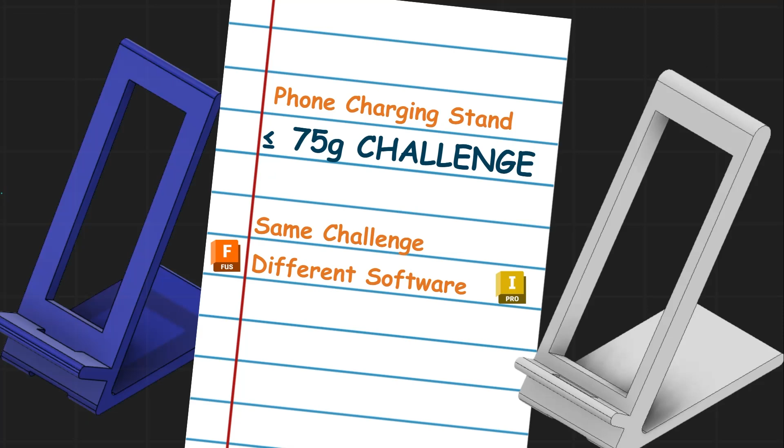Today's challenge, phone charging stand, 75 gram limit. So this is the same challenge with same constraints, different software as episode number 1. Last time we were in Inventor, today we are in Fusion.

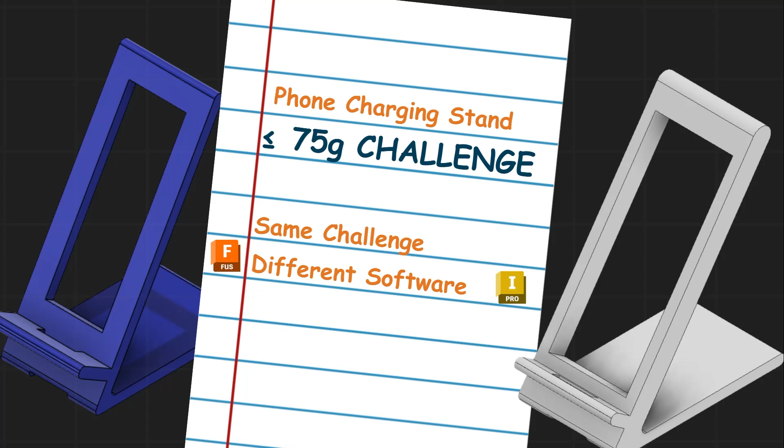So again, just a reminder, these are our design criteria. So it must be 3D printed, must use 75 grams of filament or less. This time we're using Fusion for our CAD, still using Bambu Studio for our slicer. Let's get to cooking.

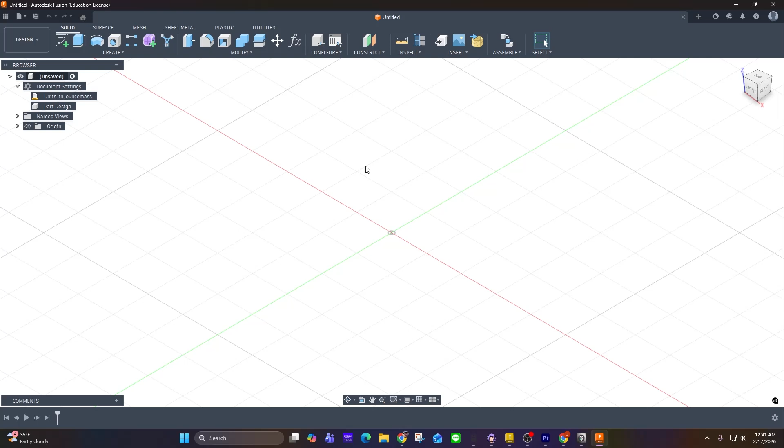All right, so here we go in Fusion. I'm going to follow the same workflow as last time. Probably throw in a couple of steps just to show some of the differences that I'm aware of between Fusion and Inventor. I am a native Fusion user. That's what I teach in my classes, so I'm pretty familiar with that.

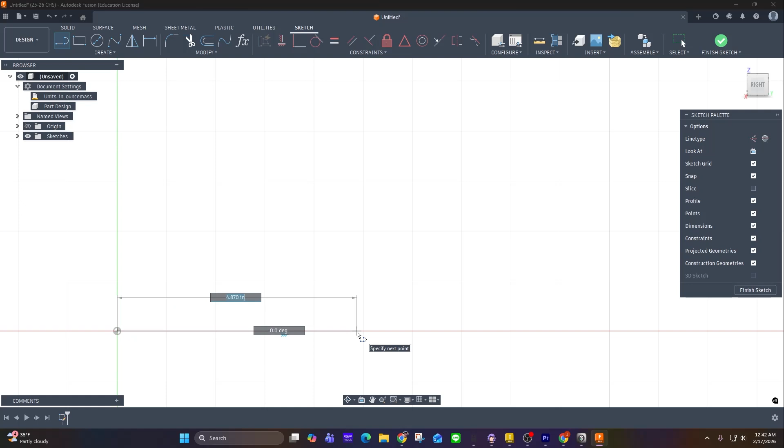So we're going to start the same way by doing a sketch on the right plane of the overall shape. I always recommend starting in the origin. I'm going to do a 4-inch long line. Then I'm going to left click and hold to make that arc. One of the things I like about Fusion is it's got the line/arc tool.

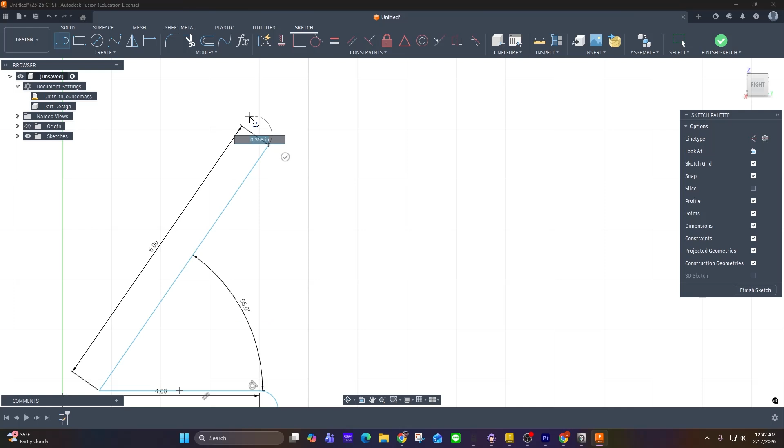If you just click, it does a line. If you click and hold, it'll allow you to do an arc. So no need to constantly be going back and forth. There we go. Now we've got the overall side shape.

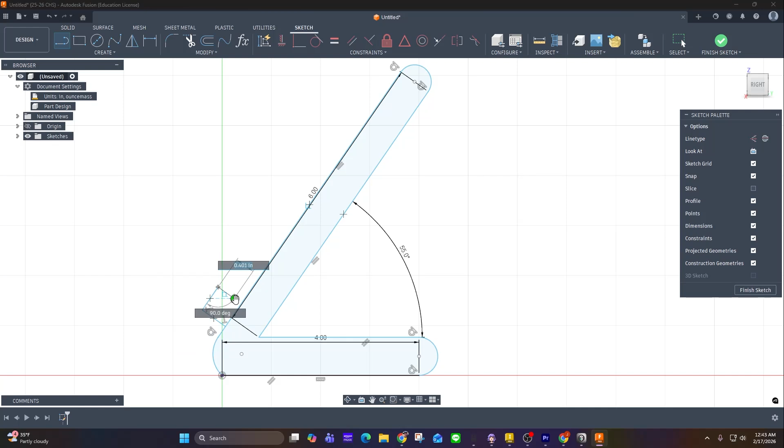I'm going to go ahead and create my rectangle lip out the front. Trim that little bit right there in the middle. There we go. Now we've got our overall size and shape, or I should say just shape.

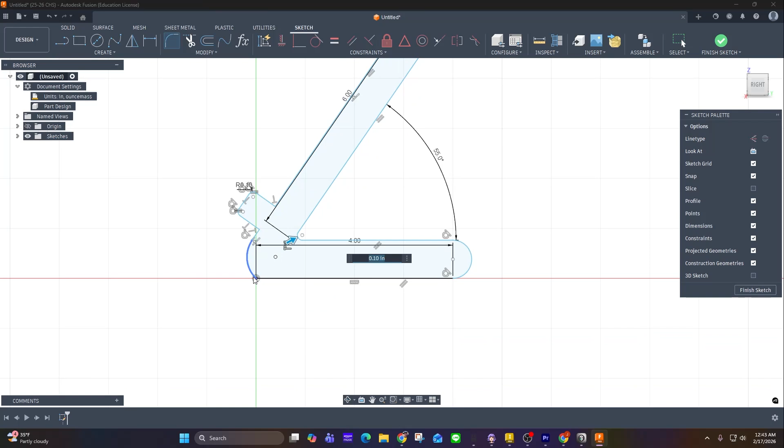I'm going to go ahead and fillet the corners here, make this a little bit rounder. Do the same on the inside here. Make that a little bit more of a nice round corner. All right, I think I've got everything kind of constrained the way I want.

That last tangent on this front corner made this very small, so we're going to make that a little bit bigger again. 0.5. Oh, that really didn't go where I wanted it to. Undo it a couple times, from here to here to give it that depth. We want that to be a 0.5. There we go.

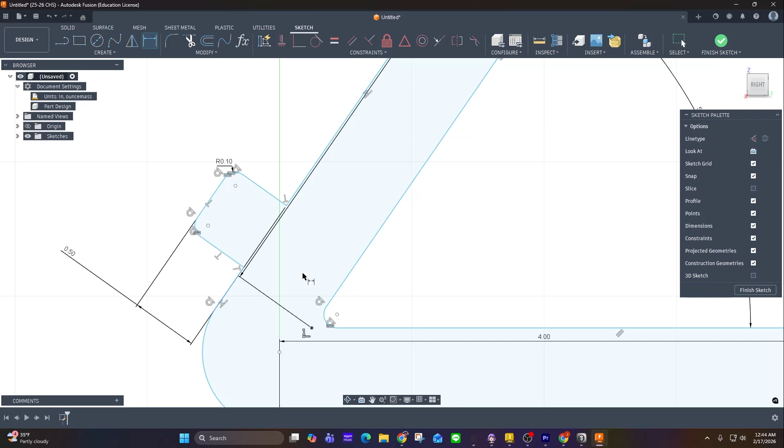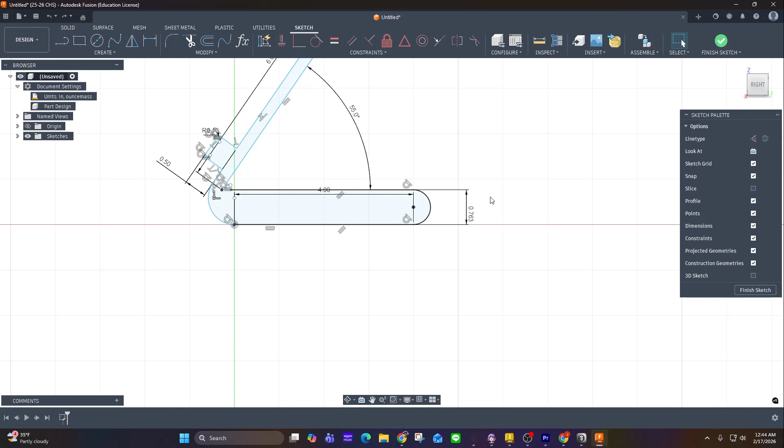All right, now let's make these a little bit thinner here and here. 0.25, check. We'll make this a little thinner as well. 0.25, check, check. You know what? Last time we ended up significantly under 75 grams on the filament. So we're actually just going to roll with this dimension. We're going to see what happens.

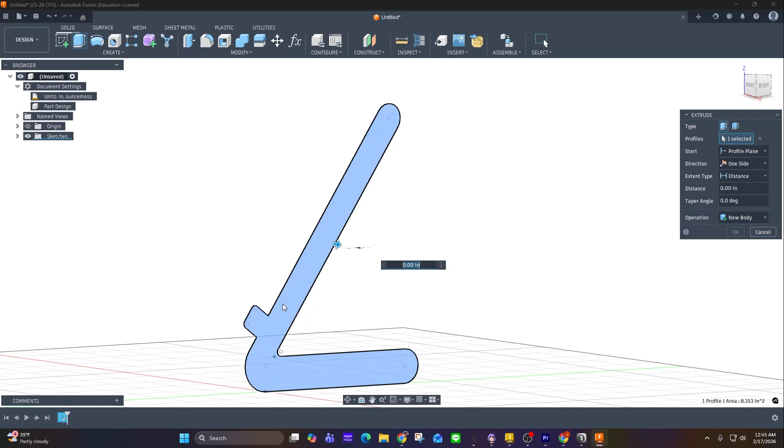So I like this overall shape. We're going to hit finish sketch. Looks very similar to what we did in Inventor. So again, next thing we're going to do is hit extrude. Our profile is already selected. We're going to do 4 inches, just like, oh, we did 2 inches last time, did we not? 2. There we go. Same similar shape.

One of the things I'm going to do real quick that I did not do in Inventor is change the material on this, and I'm going to change this to plastic. And then it's going to let me do a property check at the end to show how much as a solid object, because we're in solids, Fusion would assume this is. Just kind of doing that for smiles and giggles.

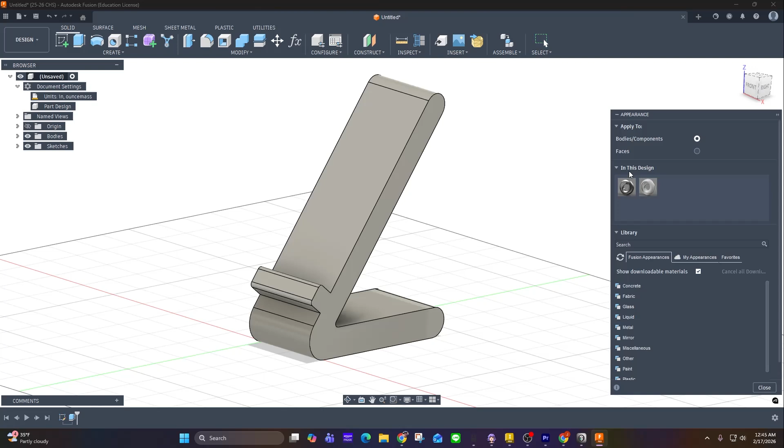And I'm also going to change the color on this just to make it a little bit more exciting than white. So I've clicked A for appearance, going over here to blue, clicking done. There we go. We could have done that in Inventor. I just did not.

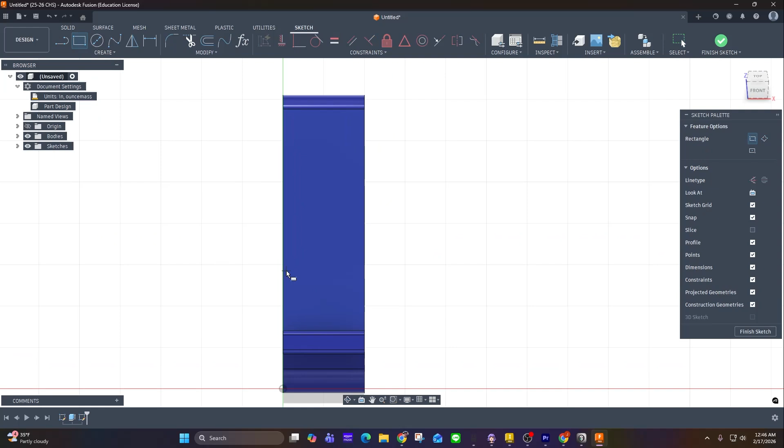So now we've got our overall shape. Now we want to create that square cut in the front. Similar workflow again, so rectangle right here on the front face. Use the dimension tools to lock in where we have it.

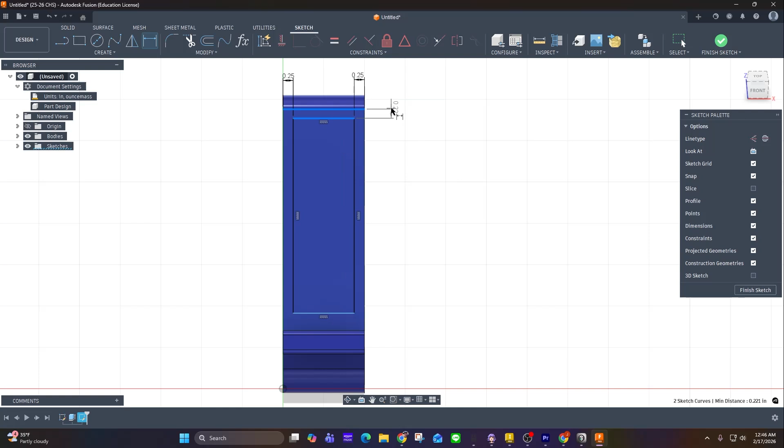So from here to here, 0.25. From here to here, 0.25. From here to this beginning of the curved line, last time we went 0.5. And then from here to here, we did this as a 0.25. Give it kind of a three-sided picture frame with a little bit thicker on the top.

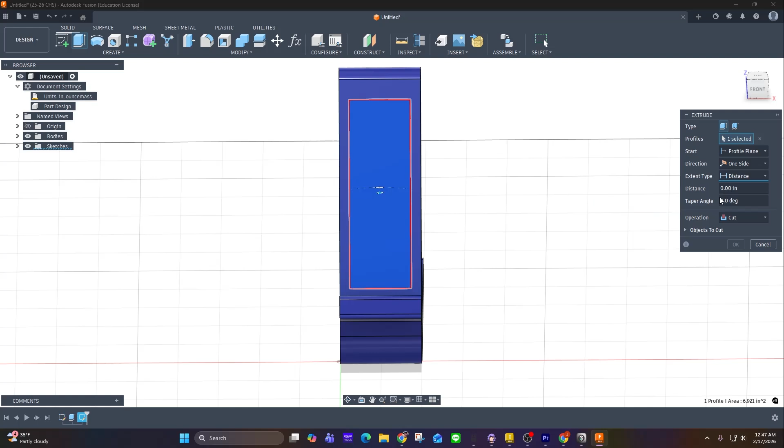So good with that. Finish sketch, do an extrude cut. So similar to Inventor, we have an operation here, and we change this over to cut. This one, the extent type instead of distance is to object. So again, same flow as Inventor, just some of the buttons and things are in different places or different clicks. So there we go. We've got our hole that's only through the top. There we go.

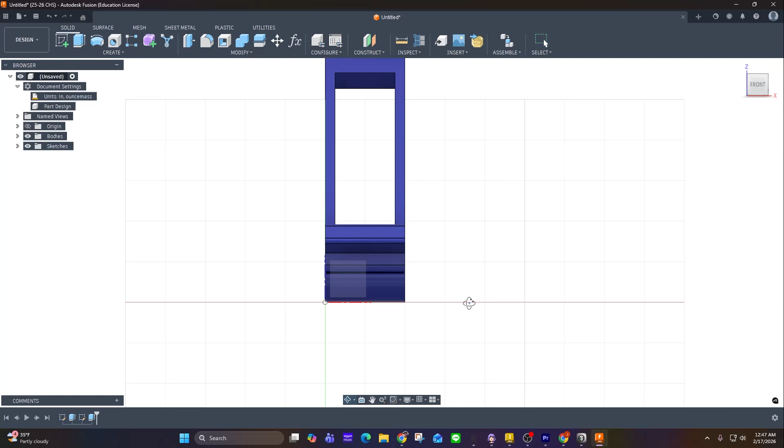Now we're going to do that bottom hole just like last time. So sketch. This time we're going to do an extra step here. Instead of carving in the middle of the object like we did last time and having to do a symmetrical cut, I'm going to create an offset plane. That's this button right here under construct. These are helpful for things like this.

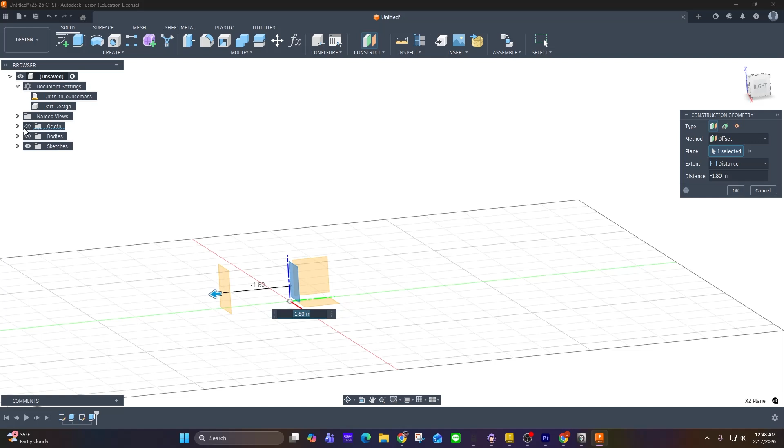I'm going to hide also the body here for a second. So this eyeball here in the browser can let me remove something for a few seconds to make my life a little easier. So this offset plane, I took this front face right here, I dragged it out a little bit. So I'm going to end up sketching out here in front of the object and in front of the body. So click OK. Now I'm going to sketch on this square way out here. Doesn't look different from this point of view, but it'll function a little bit differently than the one I did in Inventor where we were in the middle of the body.

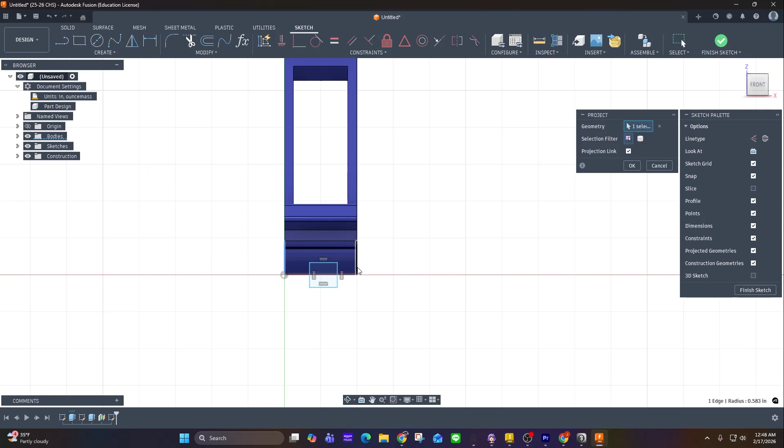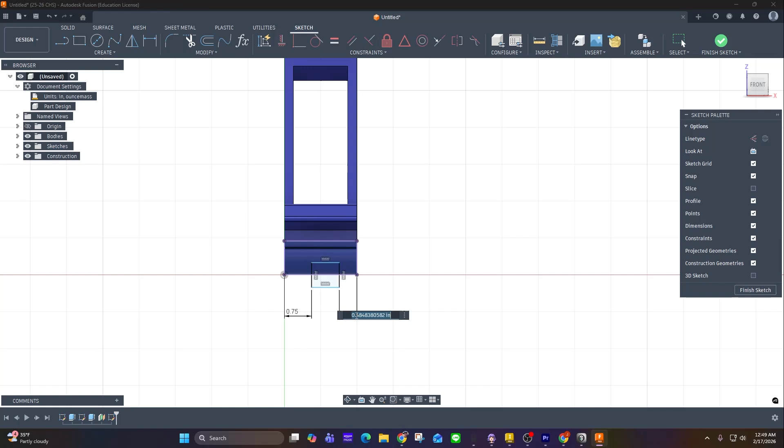Again, dimension from here to, right, I need to do a create, and then this project include and project my edge lines so I can use them. I also want to use the bottom, and we'll use the top there. All right. This was, trying to go off memory here, 0.75. No, it was 0.5. There we go. From here to the bottom, that was 0.25 maybe. We're going to go with it and see what ends up happening.

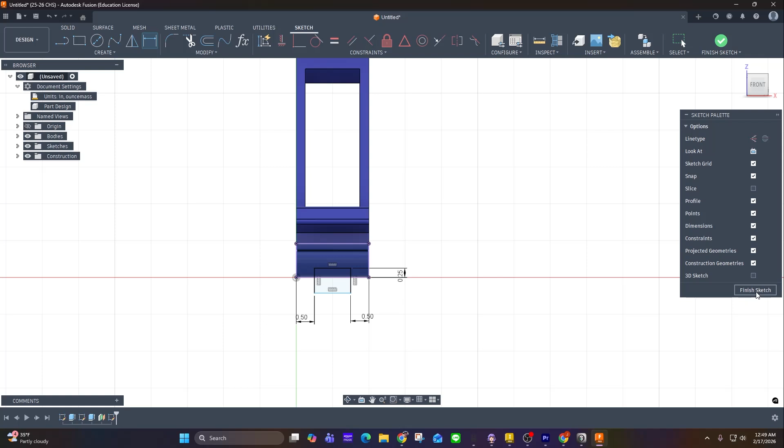All right. So I've got my rectangle shape. I'm really only extruding this top portion that lines up with the base of the phone stand. So I'm going to extrude, cut, change my extent type from distance to all, just like before. Click OK. Now I've got that channel all the way through. There we go.

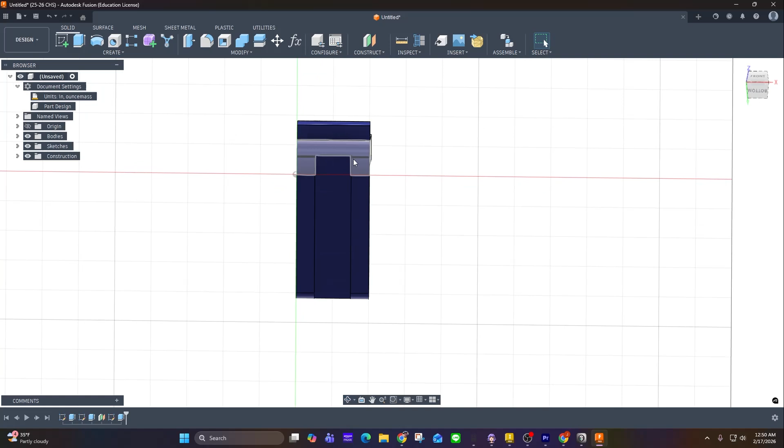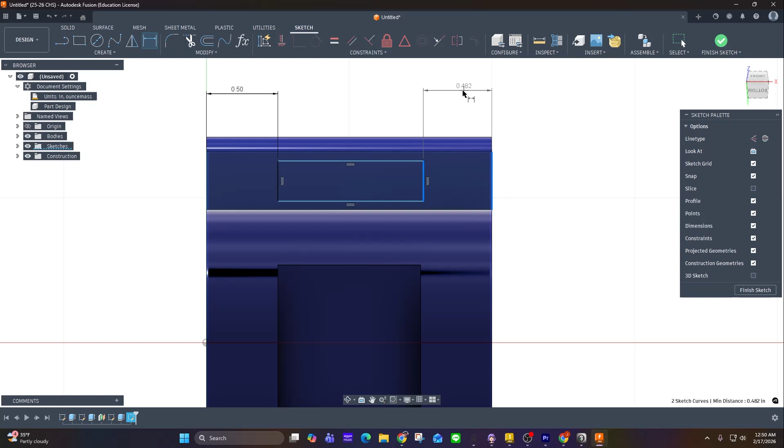And last but not least, the one that's on the bottom here. So again, sketch on this piece. I'm going to zoom in, create my rectangle. Dimension tool from here to here. 0.5. From here to here. 0.5. Overall height of this, we want it to be 0.25. We're going to try here to line these up. This didn't work in Inventor.

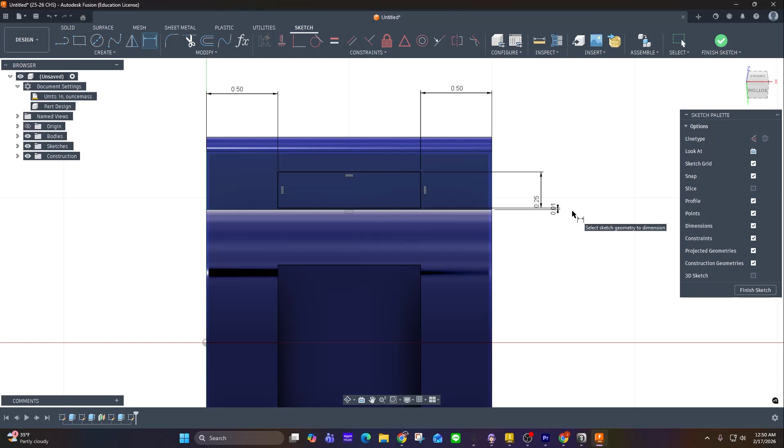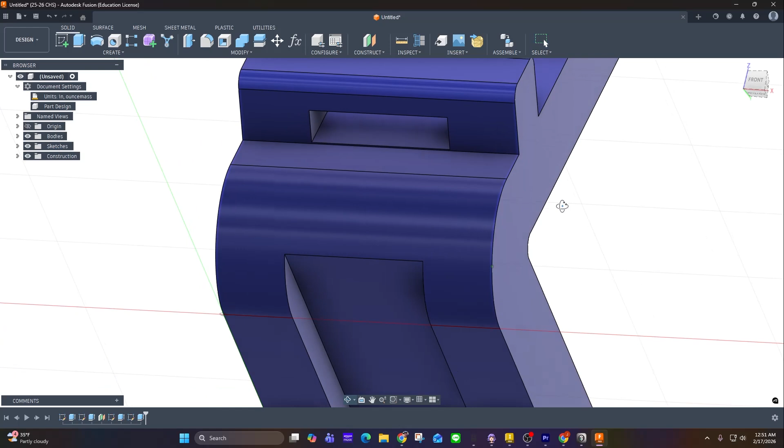All right, and then my extrude cut of that square, distance, all, cut. So this time when I do the cut, you can see the OK is grayed out. If I use this flip button, it'll now work. Before that, it was trying to cut in the wrong direction. So there we go. We've got the same shape as last time. Now we can hit save. Phone stand number 2.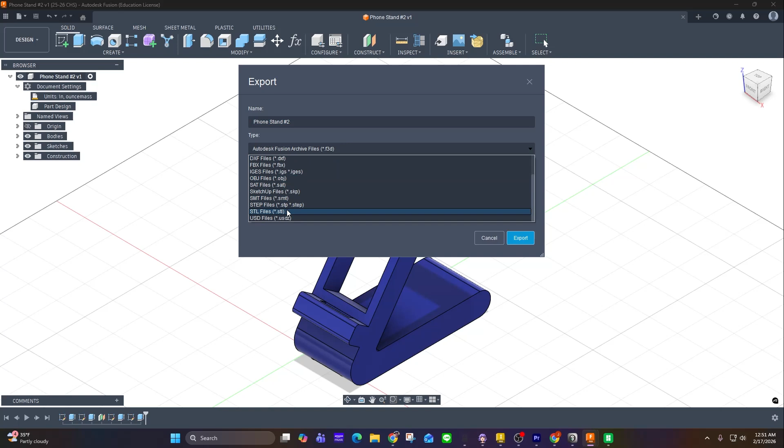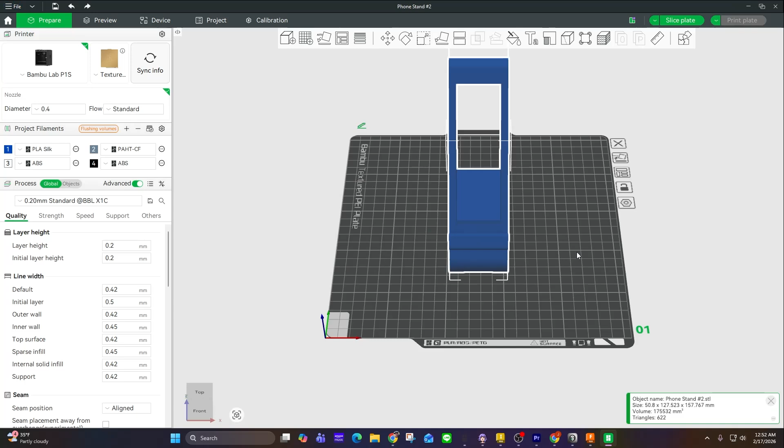And then I would export and put this into Bambu. Phone stand. So instead of an F3D file, I want to do this as an STL again. And we'll do it to my desktop. All right. So once again, file, import, phone stand number 2. There we go. Let's see what we got. Slice plate.

So I've got a little bit thicker of a base, but you can see I'm still under 75 grams. So if I made that a little bit narrower, I could definitely cut out more of this. So again, under 75 grams, challenge is met. Similar, but a little bit different workflow. And that is it.